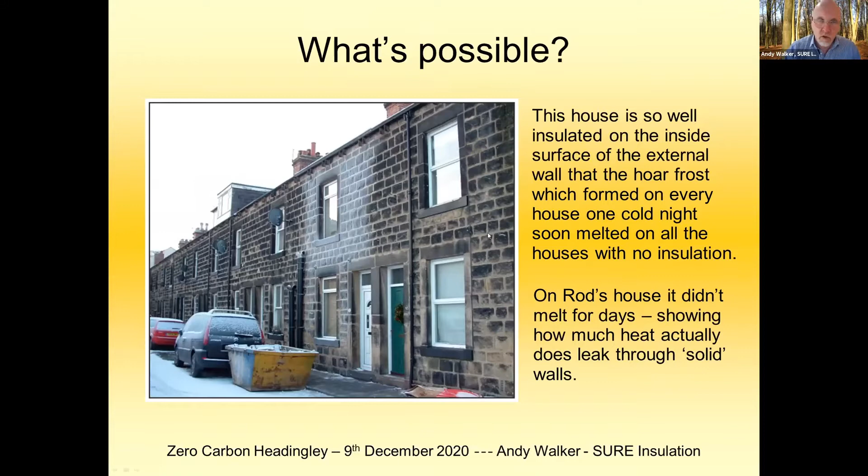This is a really dramatic indicator that all the other houses are leaking heat. So Rod's house is amazing.

It's warm and comfy all year round, and he's got a wood burning stove, but he hardly uses it. You can go in his house and the heating hasn't been on for days and it's still warm. The lighting is all ultra bright LED, run off a 12-volt leisure battery and charged from a very small solar panel out the back of his house.

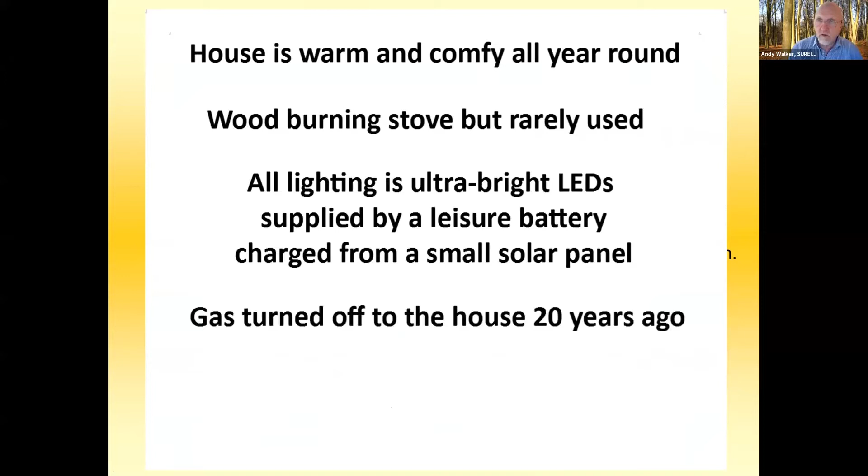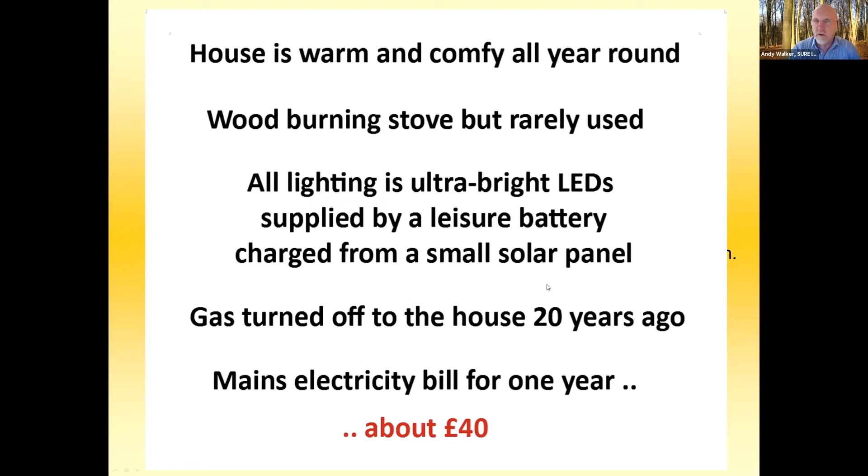The gas was turned off 20 years ago, and his mains electricity bill for the whole of one year that he showed me was about £40. Now, I'm really excited by the possibility that a 100-year-old terrace house can be made to be this self-sufficient. If we could do that with the majority of houses, that would make a huge difference.

My journey to here - I started a community group in Otley in 2008. Then I went on to make an insulation company, and was part of writing the home insulation manual. I work with Leeds Beckett University.

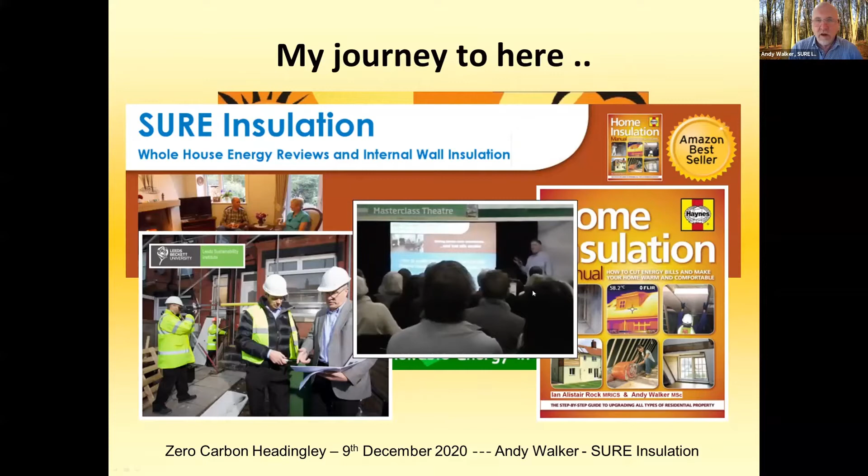This is me and Chris Gorse reviewing some plans of a house that we're doing monitoring in. I do talks in various places. This was at the Harrogate Home Building and Renovation Show. I'm giving some advice at an earthship down in the south of England.

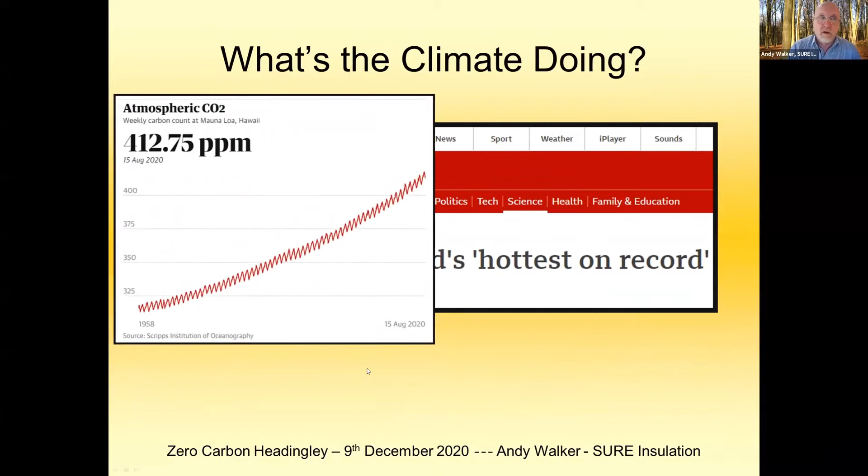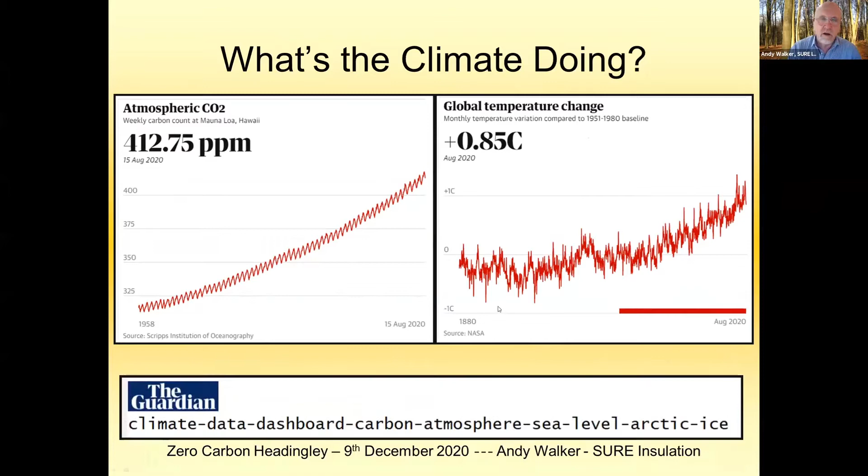What's the climate doing? Well, September this year was the hottest ever. Atmospheric carbon is doing this, and the temperature is doing that. This red bar is the same time scale as this graph, so you can see the two are in line. Here's the source of that information.

Extreme weather events are happening more frequently. We'll all be very aware of the dreadful fires in America. And in fact, this year in the Gulf of Mexico was the first time ever there's been two hurricanes at the same time, and that's quite significant and a real indicator of the warming waters creating all that energy.

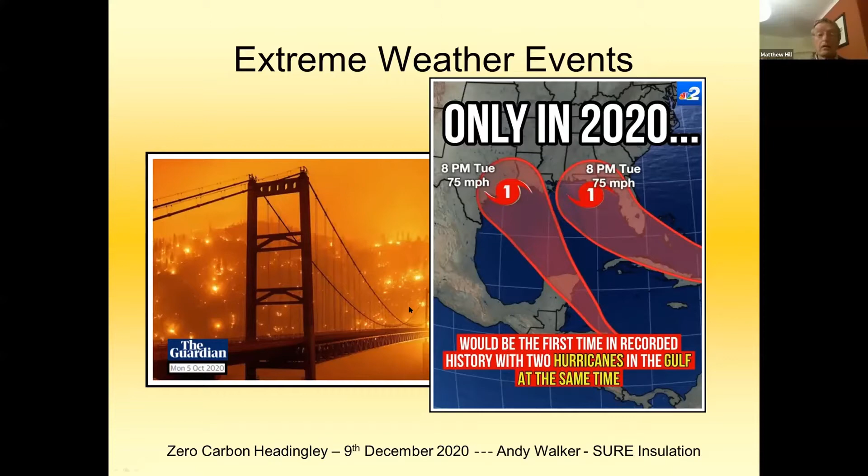Now, I don't know about you, but that's getting a bit close. I always thought tornadoes happened in Texas or somewhere, but Amsterdam really isn't very far away.

One of the other huge drivers for me to be part of this work is the fuel poverty in the UK, which I think is a criminal effect of poor policies. Even with the most recently massaged figures, 2.5 million households in the UK are living in a place where they have to choose between heating or eating. That's actually 10.3% of the whole population.

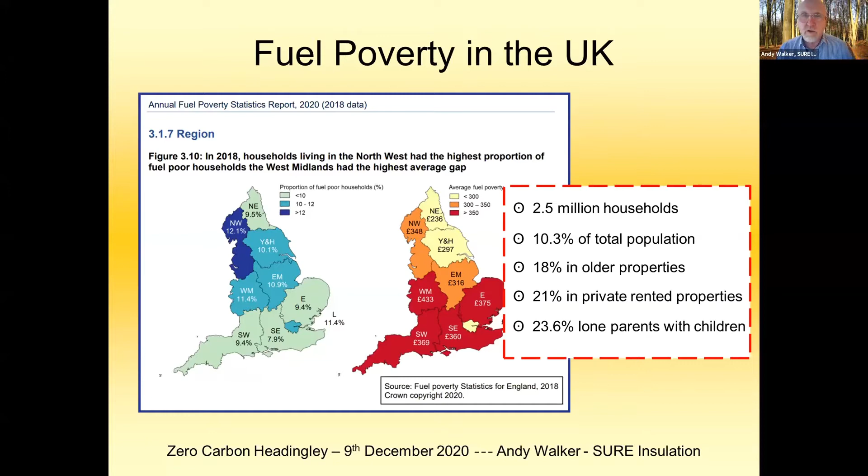18% in older houses, 21% in private rented properties, and that's utterly staggering, criminal, 23% of lone parents with children. Last week I was giving this talk, or a similar one, to a community group in the Scottish borders. So I looked up the figures in Scotland, and I was horrified to find the lowest fuel poverty there is in Edinburgh, and the highest is nearly 60%.

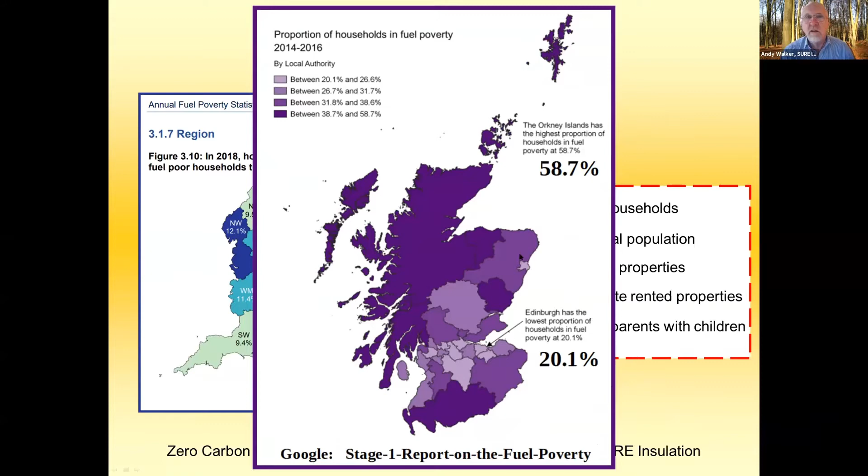So what can be achieved? I've just drawn a very simple bar graph here. The one on the left, the average figure, about 15,000 kilowatt hours combined gas and electricity for the average house. At this end down here, the passive house is about a tenth of that, 1,500 kilowatt hours a year.

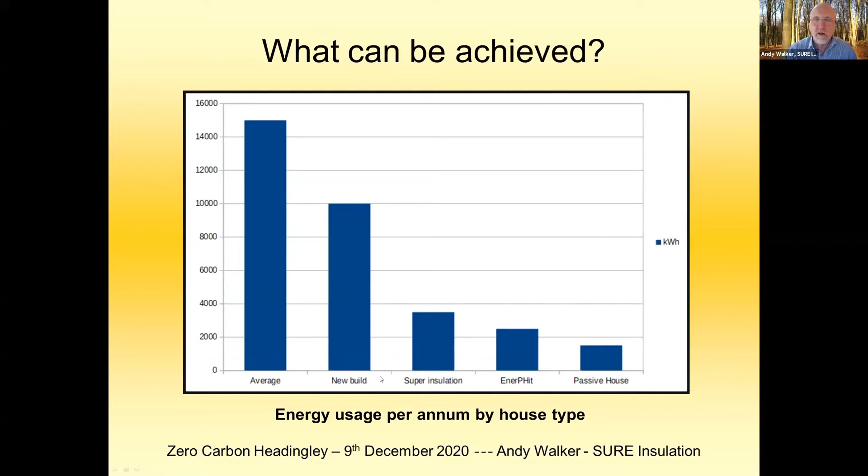A new build is still pretty bad. They're just not meeting the standards. EnerPHit is a kind of diluted passive house version, but very expensive because all the components have to have certificates. So super insulation, a term where we're going well beyond building regs, making a big effort to improve air tightness and putting insulation on our external surfaces, is a good target, I feel.

So why is it a good idea? Well, the whole thing would create tens of thousands of jobs, hundreds of thousands. It would certainly stimulate the manufacturing industry and the supply chain. The health and well-being of millions of people would be affected, and of course that reduces the burden on our precious NHS. It builds community involvement.

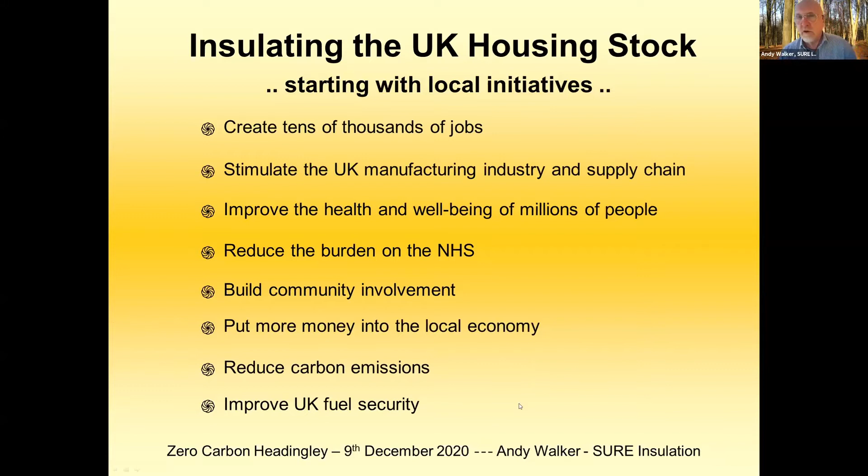Once you've got people working together, they all start to pull their socks up, and if they're not paying huge fuel bills, they are putting money into the local economy. Absolutely, it would reduce carbon emissions, and in fact it would improve UK's fuel security because we wouldn't have to import as much gas and electricity.

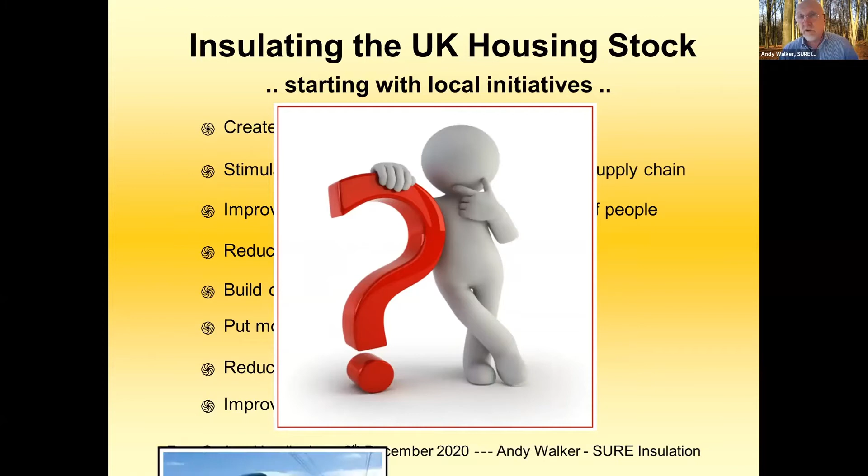Now hang on, if it's such a good thing, if there are so many co-benefits, why is it not one of the biggest national infrastructure priorities that we have? You could choose your own capital project that we could do without to give us insulation for the whole of Britain. Now, government policy we need to change.

We need something like £200 billion to fix all of this, which sounds like a lot of money, but they seem to find it. If one of their mates has got an airline who's going broke, or a bank is about to crash, they just seem to print it.

writetothem.com is an easy way to send a message to your local councillor or your local MP.

Heat loss from a building, there's several ways that it comes out. Through the floor is often a forgotten one.

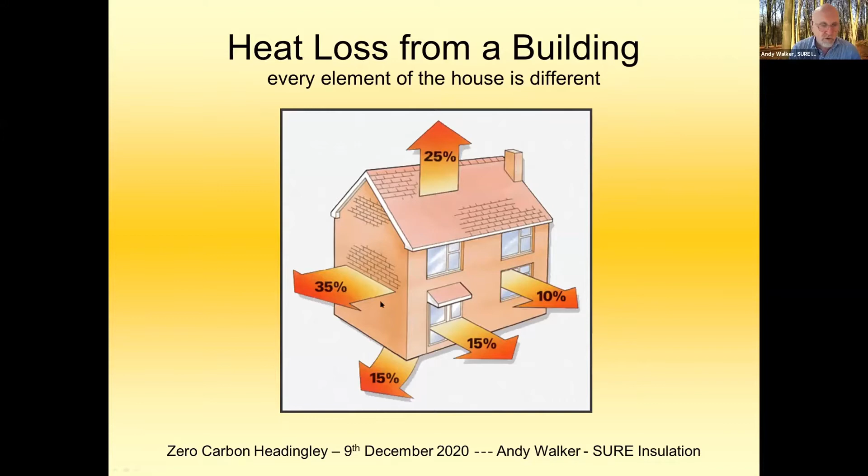Could we have people turning off their microphones, perhaps? Thank you. With a stone built property, this figure through the walls would be about 45%.

Okay, I'm going to explain U values, and the reason I want to do this is because every discussion about what you have now and what you could have is based on this simple number.

It's a term which describes the amount of heat which is flowing through a surface. It applies to any surface. So let's just take this 1 square meter of wall. We're going to say it's got a U value of 5.

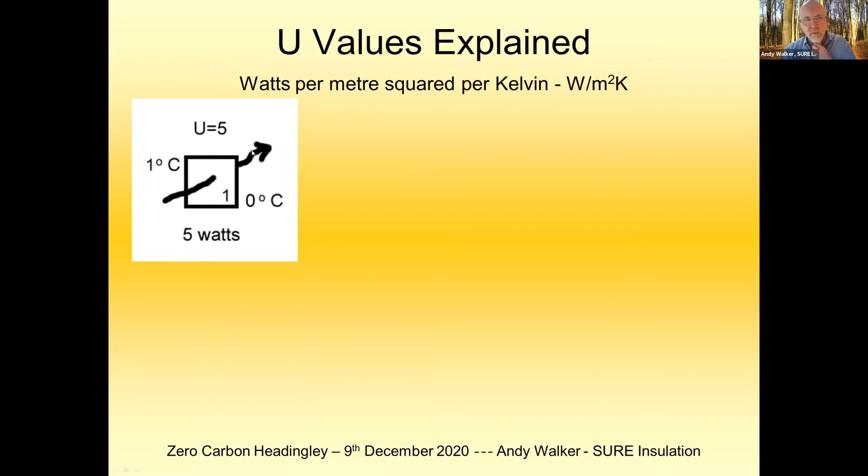There's a temperature difference of 1 degree C inside to outside. That 5 means that 5 watts of energy is permanently flowing through that 1 square meter. If we go up to 20 degrees C, a more typical room temperature, then we're now up to 100 watts through that 1 square meter.

If we take a more typical area of an external wall, let's say it's 10 square meters, again with room temperature, we're now up to 1,000 watts of energy, 1 kilowatt. Now, there will be losses through the other surfaces in that room, the floor, the party walls, and the ceiling. But whilst we're sitting in this room, we have to pour 1,000 watts of energy into that room, or else that temperature will fall.

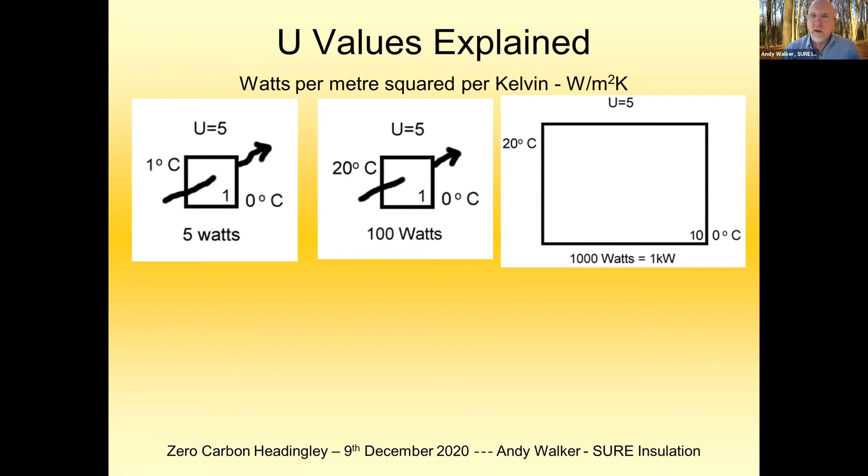I bet you've all been in houses where you can get the room warm, but the moment you turn the heat off, the temperature plummets. So a fire like this, I imagine there are people on the call who can remember these. I grew up with this kind of heater in the corner of the room trying to warm it up.

Okay, well, let's put some insulation on the wall. Let's try 100 millimeters of Kingspan, often called PIR. The U value would drop to 0.25, meaning there'd only be 0.25 watts flowing through that surface. For the 20 degrees C room temperature case, we're now up to only 5 watts, and for the larger wall here at room temperature, we're up to only 50 watts.

Now 50 watts - a human being gives off about 50 watts when sitting still, or 3 cats. So you could say we either need more insulation or more cats.

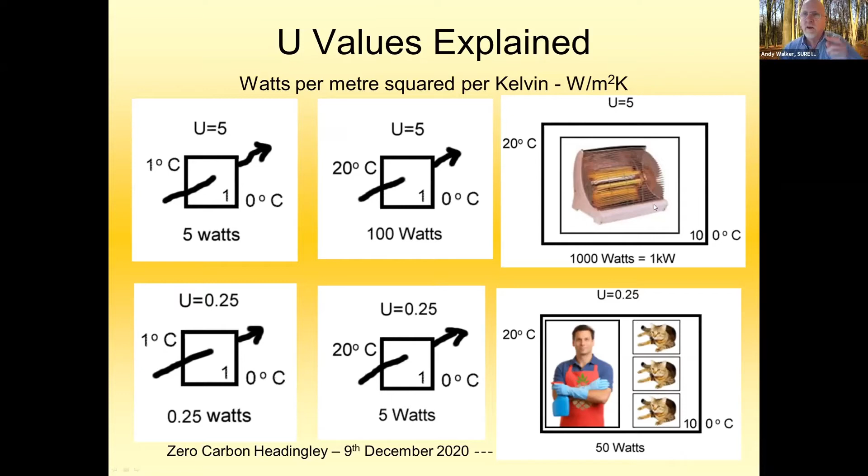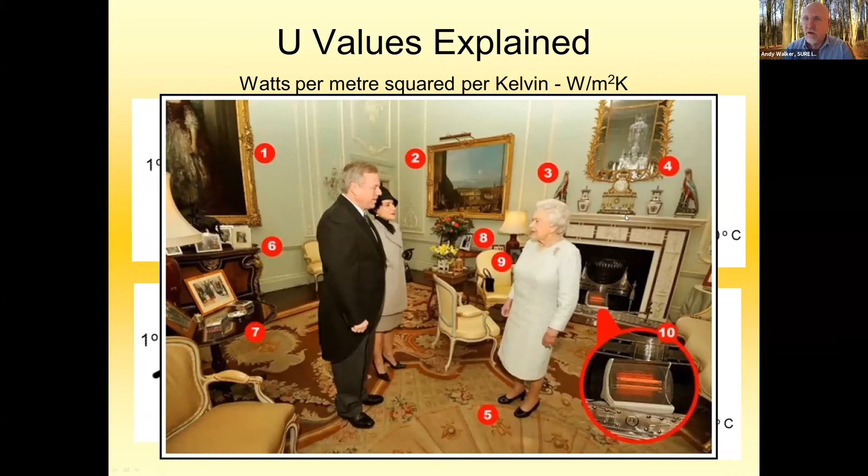Now, this kind of fire, I mean, I can't believe anybody still uses this kind of fire. Well, here's the funny thing - in a newspaper, only a couple of years ago, there was this picture of the Queen meeting some dignitaries. What is she heating her room with, surrounded by millions of pounds worth of paintings? Well, it's a fire like that.

Okay, so let's give you a framework - this is important because this is how we describe what's possible in each house. Stone built house, somewhere between 4 and 10, brick built 1.5 to 5. The golden standard here is the U value of 0.1.

If we can get down towards that, then your house is going to self-heat. What builders would typically do is put cavity wall insulation in, which is pretty bad, or just 50 millimeters of PIR, Kingspan, which is also not close to our ambitious target.

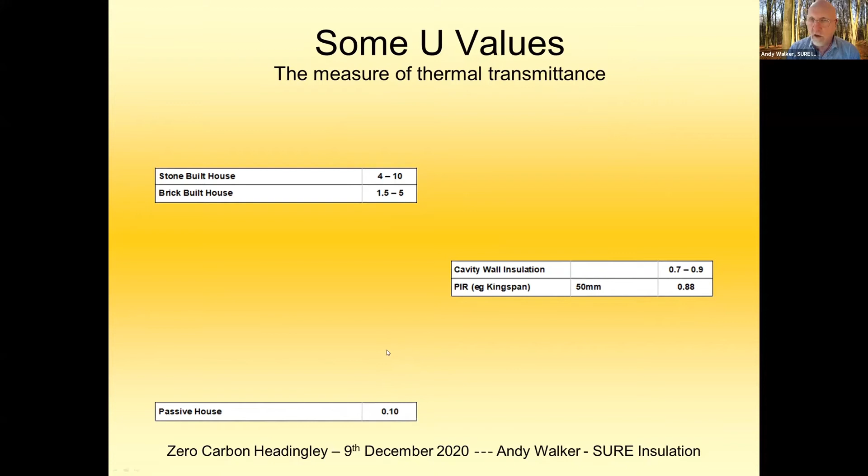200 millimeters of mineral wool or polystyrene or 100 millimeters of Kingspan gives us a U value in this kind of area. Or if you want to get more ambitious, then PIR at 150 millimeters comes to here. The only other material that can challenge Kingspan as a rigid board insulant is aerogel, but it's 10 times the price, so it's not really available as a domestic product.

Single glazed window is 5, double glazed window with air 2.6 to 2.9, argon filled double glaze is twice as good, argon filled triple glaze twice as good again. Now some of you will perhaps have leaded lights in your rooms or above the door, but the lead is so conductive that a typical stained glass window, leaded light window, has got a U value of over 100. So it's practically thermally transparent, heat just blowing out.

And for comparison, here are some figures for metals, which are wonderfully conductive.

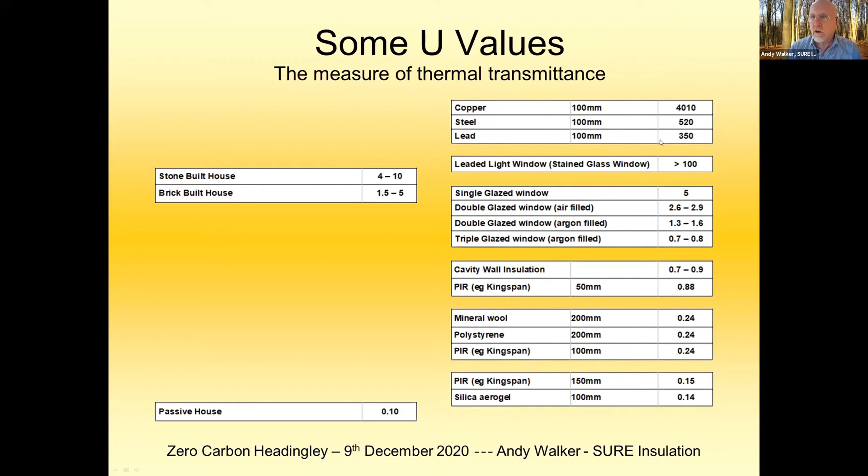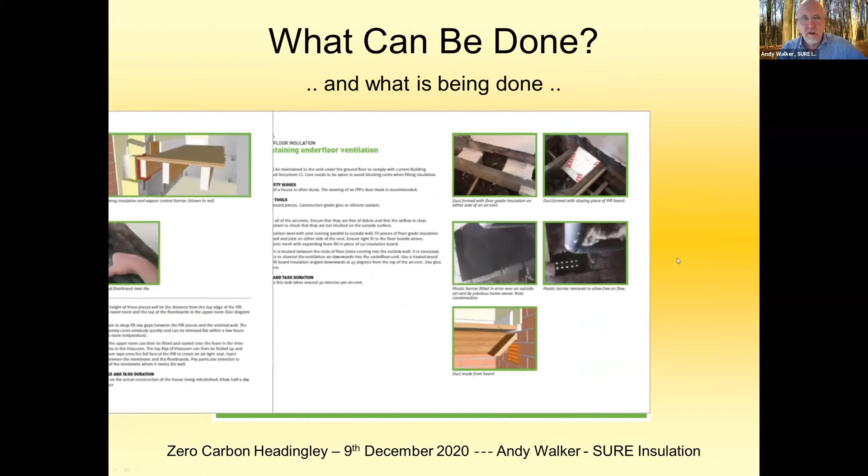What can be done? Well, this is a manual that I worked on with Leeder, and Matthew is with us today from Leeder, and he helped with this. I'll let some of these pages slide on as I'm talking about this. This is a guidance manual of how to retrofit particular aspects of your home, and this is available for each of you to download as a PDF. It's available for anybody to download. I'll give you the link.

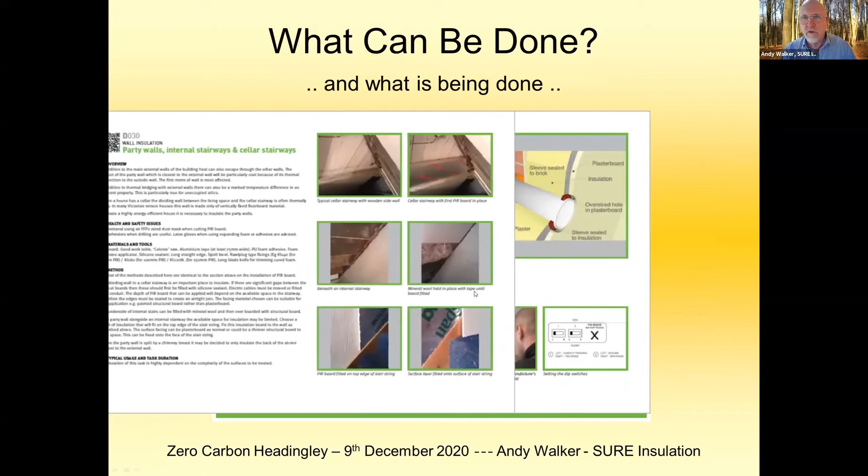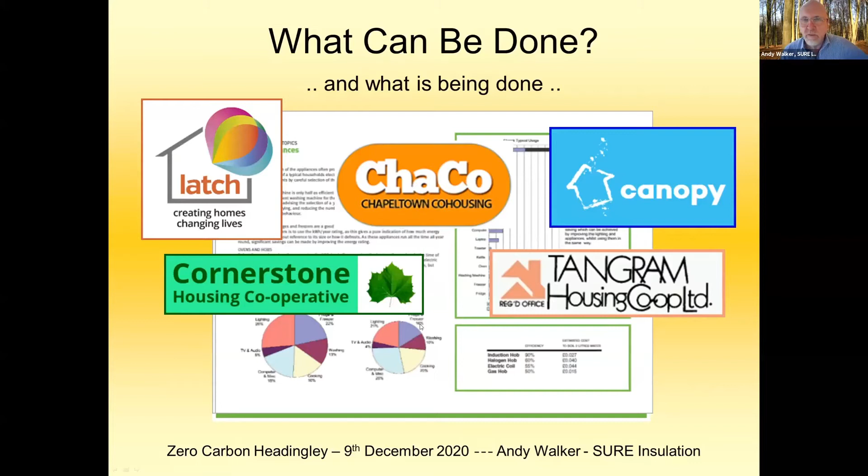This gives you some of the ideas about what you can do in particular places. These are some of the housing associations and housing co-ops that I've worked with in Leeds, and they're using this manual pretty much on a daily basis. This is worth having a look at.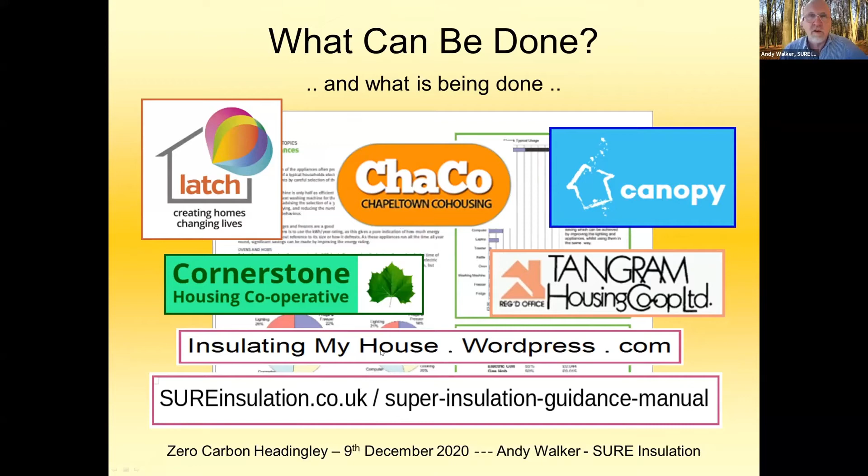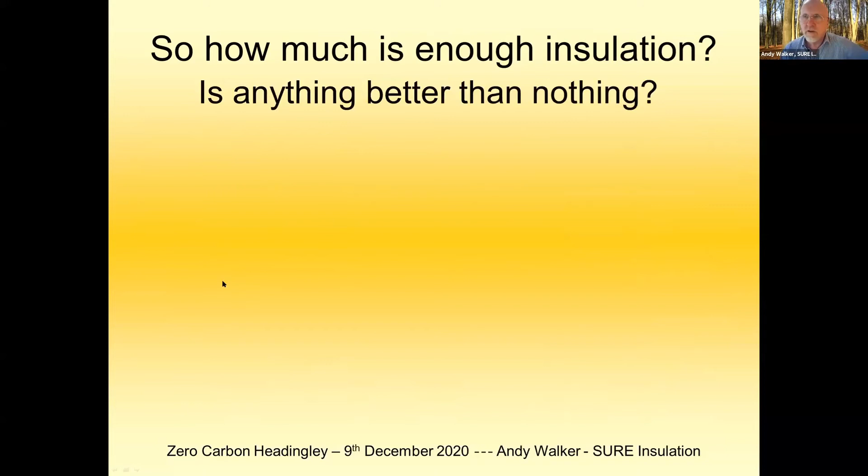Okay, so how much is enough insulation? This is always a good question. Is anything better than nothing? Well, no - if it's cold and you're not wearing enough, you're going to be cold.

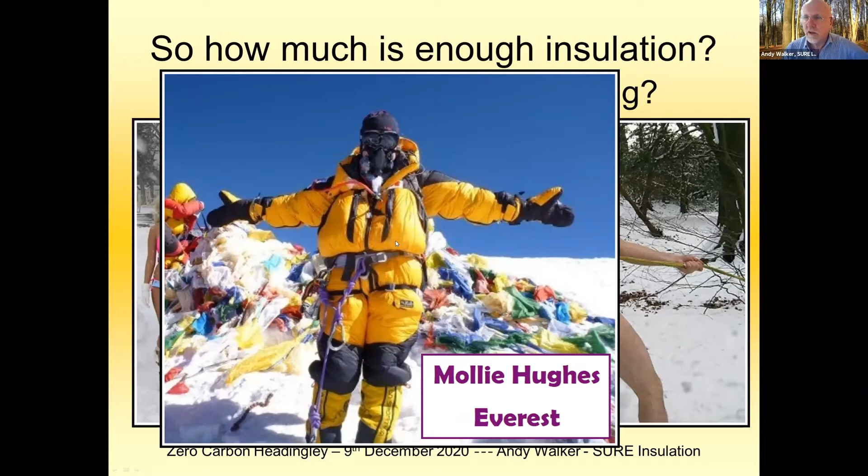So what we need is - this is Mollie Hughes, who was the first British woman to climb Everest by 2 different routes. And here she is wearing sufficient insulation to keep her warm. That's the measure - that's how you decide how much is enough.

So here's a case study of a house in Armley I did a couple of years ago. This is the room I was working in, an upstairs bedroom. It's actually got 3 external walls on it, the gable wall around the corner.

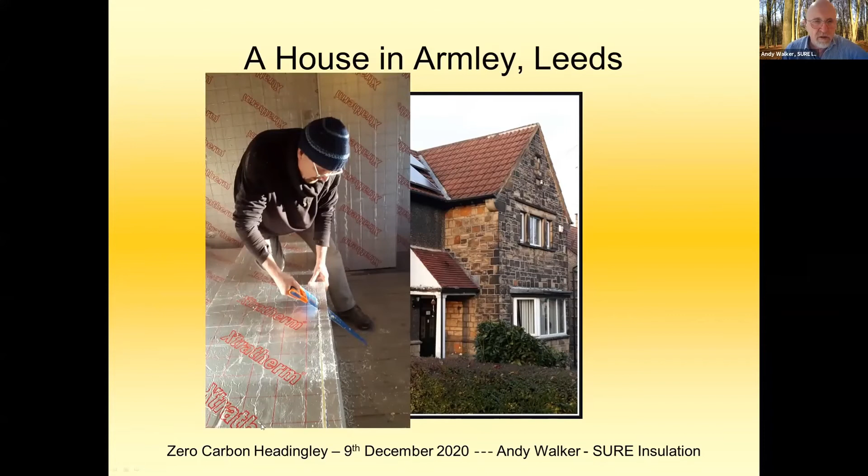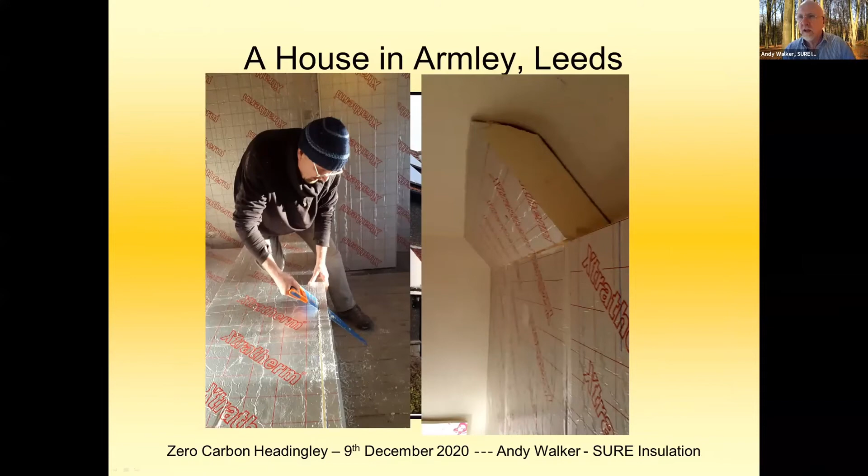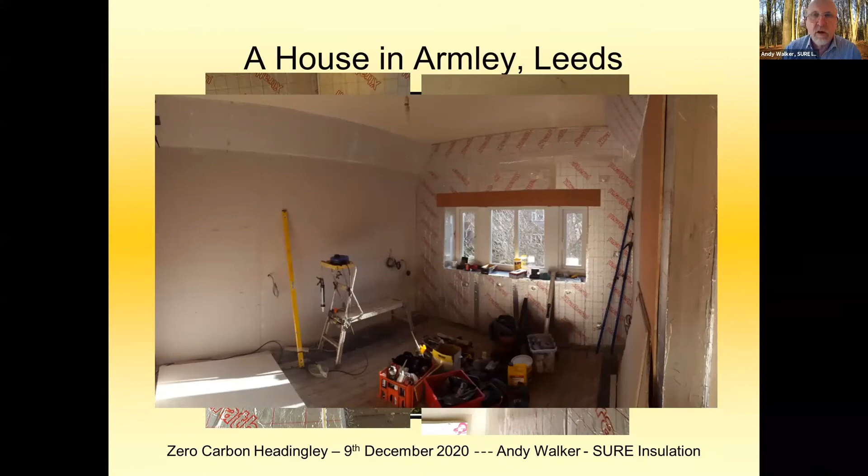Now, this is some of the Xtratherm. I'm just shaping it here, and it's actually going into this sloping part of the ceiling, which apparently in Cornwall they have the wonderful word 'skeeling,' which I'm now trying to bring into every conversation. Here's a typical view of that room, and we've insulated the outside surface, this wall and these sloping sections.

With 150 millimeters of Xtratherm, this has been a transformational change to the room. It was so cold that even with the heating full on with their hot air heating system, they couldn't use it. They wanted to use it as their main bedroom, but they couldn't. In fact, the work I did blocked up the hot air vent on purpose.

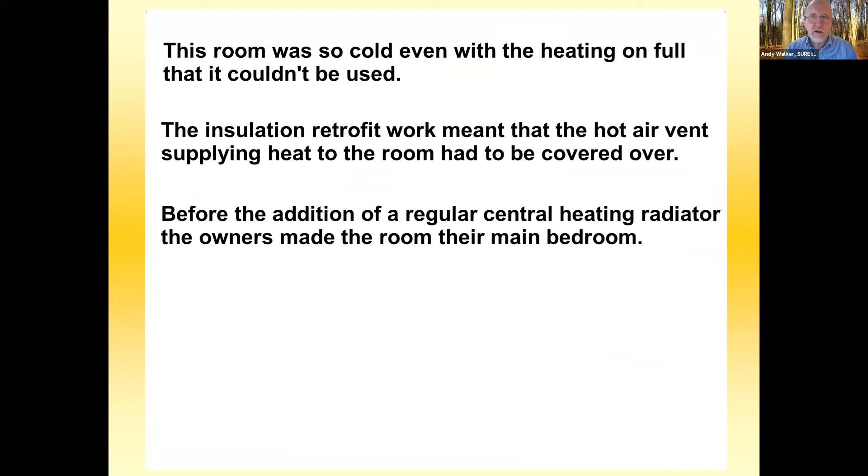Don't worry, I did notice it was there, but it just happened to be where I wanted to put some insulation. Before they put in a central heating radiator as planned, they made it their main bedroom, and found that with just 2 people in there and the bedside lights on, the room stayed at a comfortable temperature. In fact, they told me it's now the warmest room in the house. Insulation works.

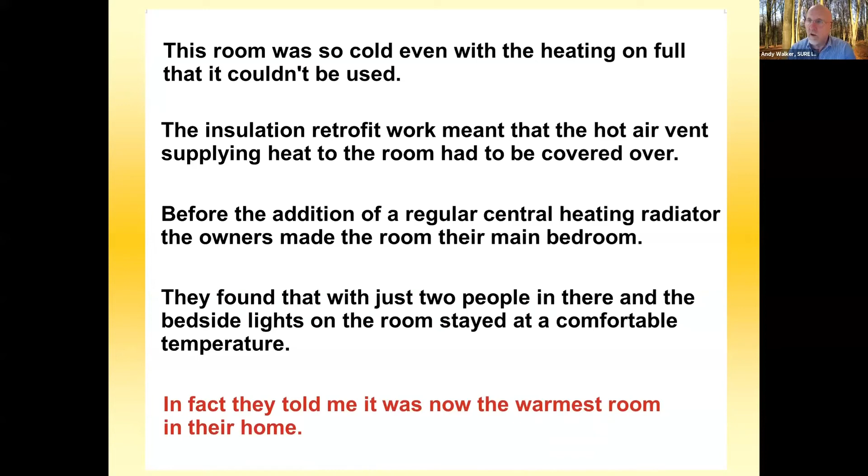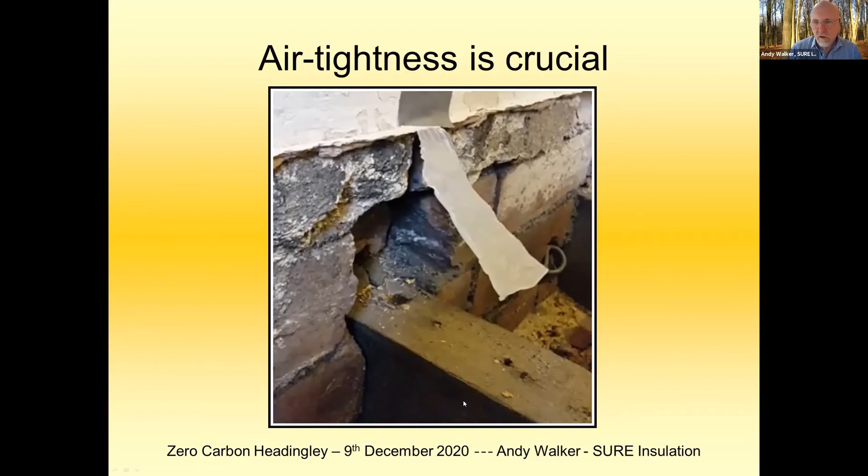Now, air tightness is crucial. I did have a video to show you here, but I'm not going to play that tonight. This is the floor joist going into the inner leaf of the outer wall. What's not understood well is that they're sitting in loose sockets, and there's always cold air blowing in around them. This tissue paper I had taped onto the wall was blowing backwards and forwards because of the airflow coming in. It's really important to deal with this air tightness and cold air blowing into the center of the house to get a warm home.

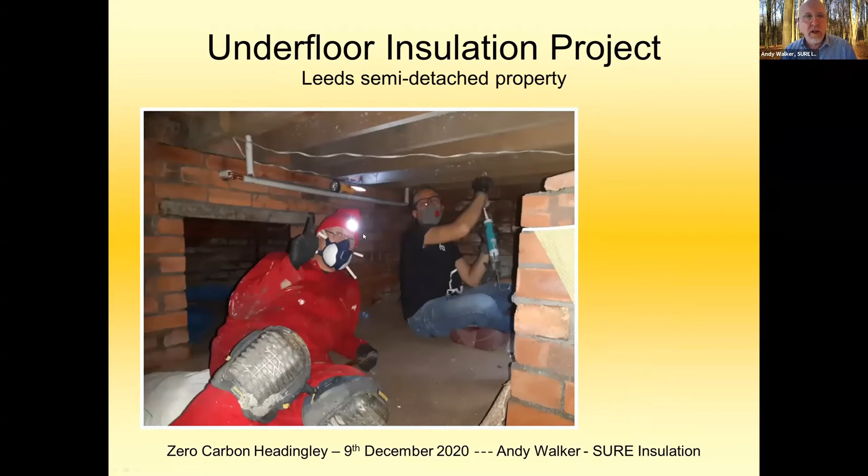Okay, underfloor insulation project. This is working under a house in, I can't remember, Headingley. There we are, it's in Leeds. You've got to have all the gear on, of course, to do this kind of work.

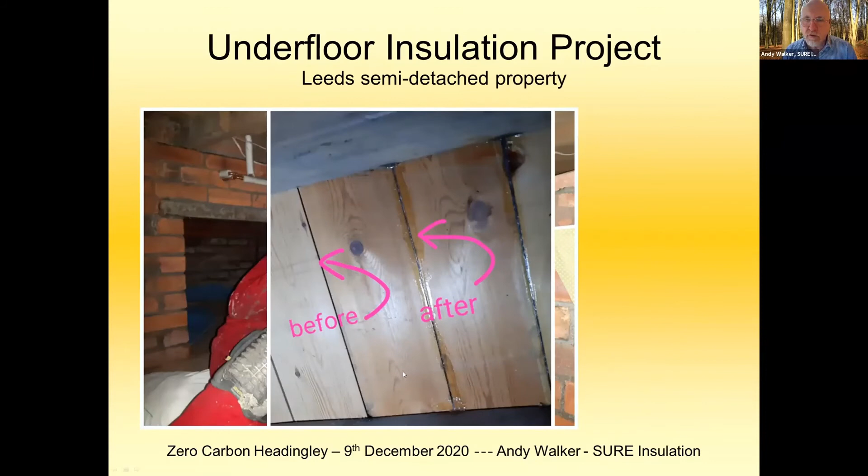What we're doing here is one of the jobs is to seal the gaps between all of the floorboards. There's a lot of air leaks between the boards as they shrink over time, and also around the edges. So bathroom silicone sealant is how we do that. Here's some expanding foam going in around the edges of the room.

You find some treasure whilst you're down under these properties. Here's a remarkable old newspaper that we found. I think there were adverts for cars for £300 brand new or something like this.

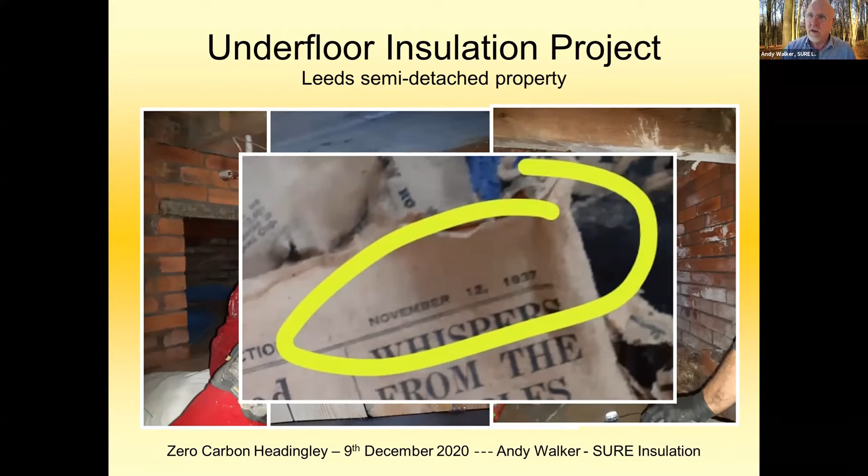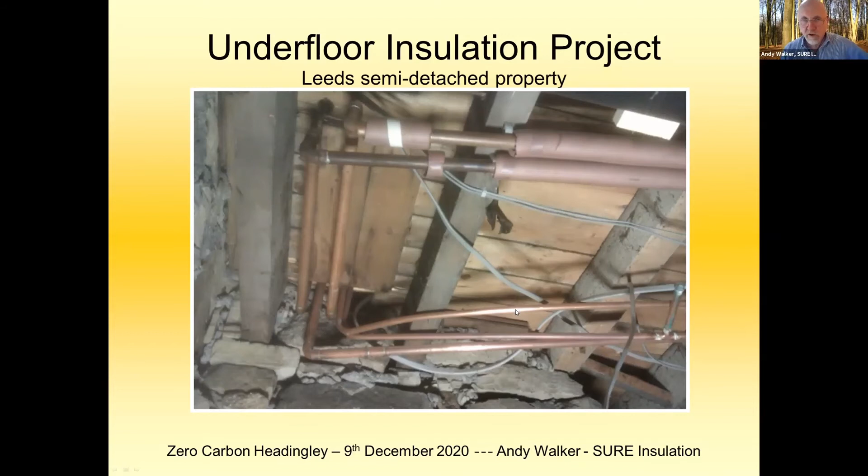The other thing you find under floors is meter after meter of bare copper pipe, and this is hemorrhaging heat into the local area. Copper is incredibly conductive, so the outside temperature of these pipes will be exactly the same as the hot water inside them, and that heat is being wasted.

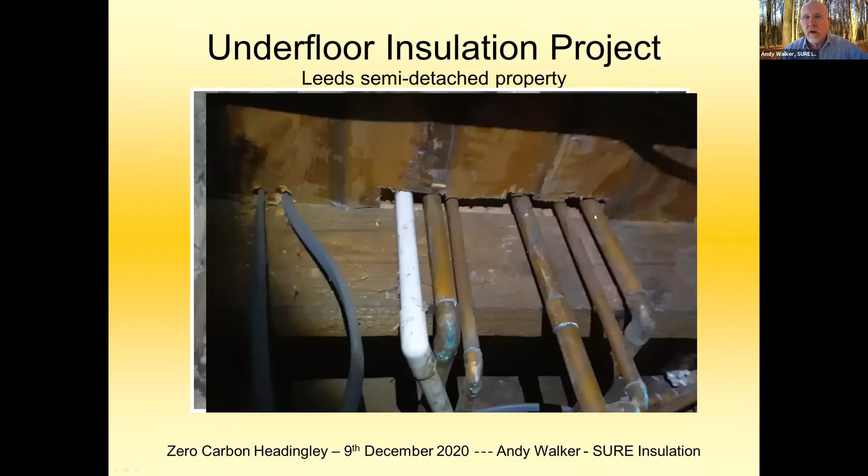Quite often you'll find that where the pipes are going through the floorboards, people without training have left huge holes, and this is another source of cold air blowing into the house from under the floor. Of course, what we've really got to do is put a very thick layer of insulation around the pipework to keep the heat in. One of the advantages of this is that the hot water created in your boiler actually gets delivered to the radiators in your room at about the same temperature it started. So, of course, your rooms are going to heat up quicker as well.

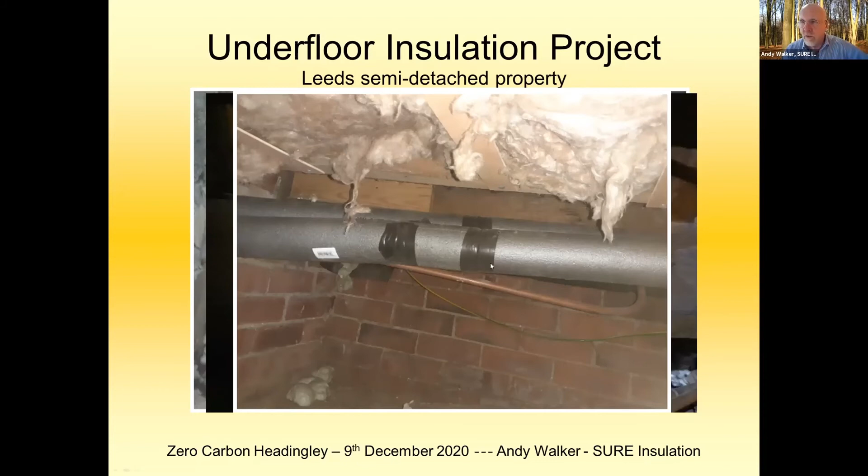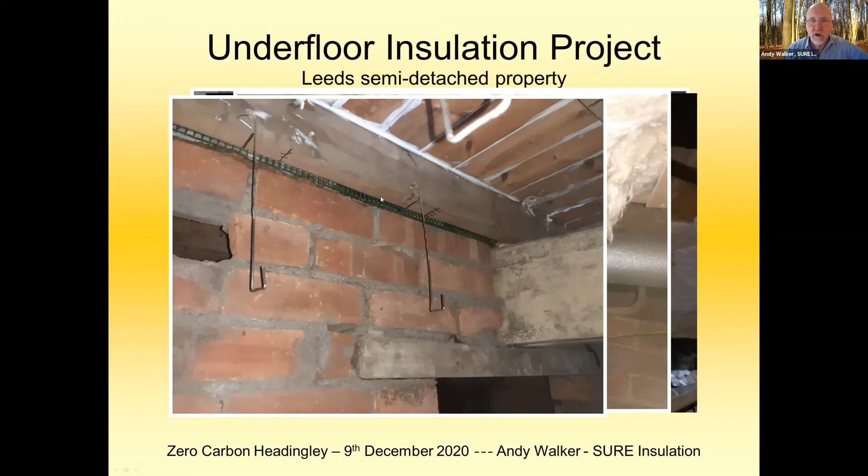This is a detail showing the silicone on the joints. At the edge of the wall here, I've put some plastic mesh, and I'm going to fill this entire space behind this joist with expanding foam, which gives me both airtightness and insulation. These metal hangers are part of a suspension system I create, which allows me to put 2 layers of mineral wool below the floor, one between the joist and one below it at right angles, and you can get down to some very low U values by doing that.

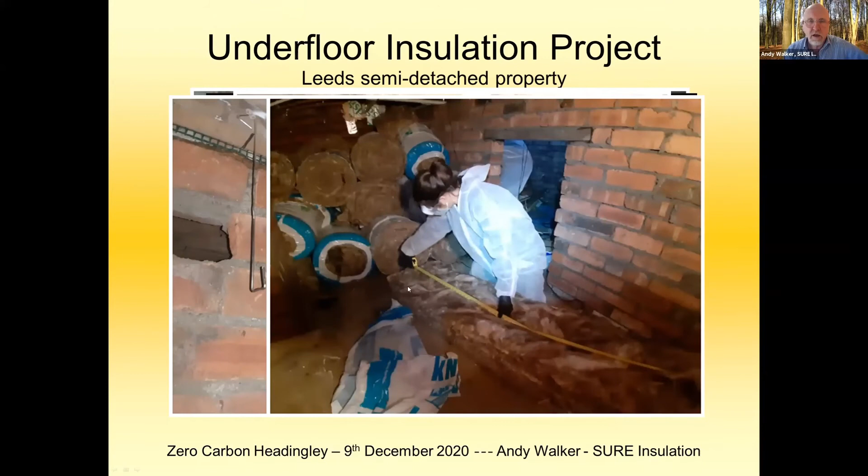So we end up with a team of people down here. You measure the insulation out, then fit it between the joists, and appropriate PPE is necessary for this. This is actually a powered respirator.

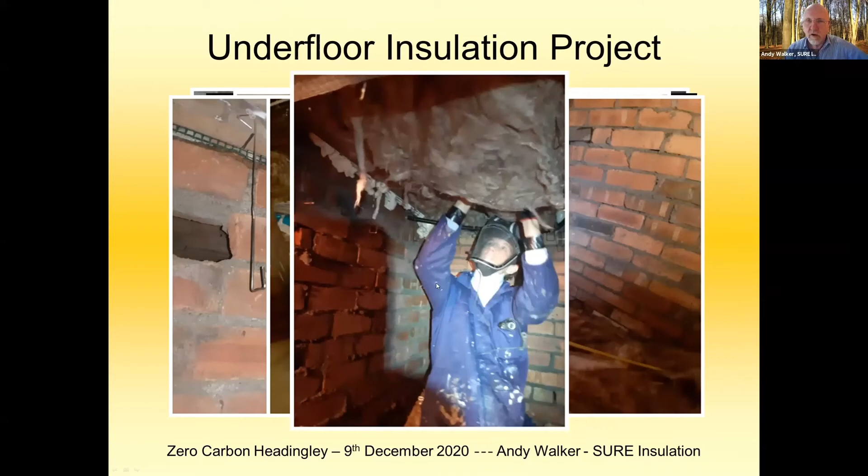So here's a community insulation project. I've repurposed the term housewarming party to describe how people can come together and work on each other's homes, and I run workshops in people's homes to get the job done. This is a house in York. It's actually one of the founders of York Community Energy.

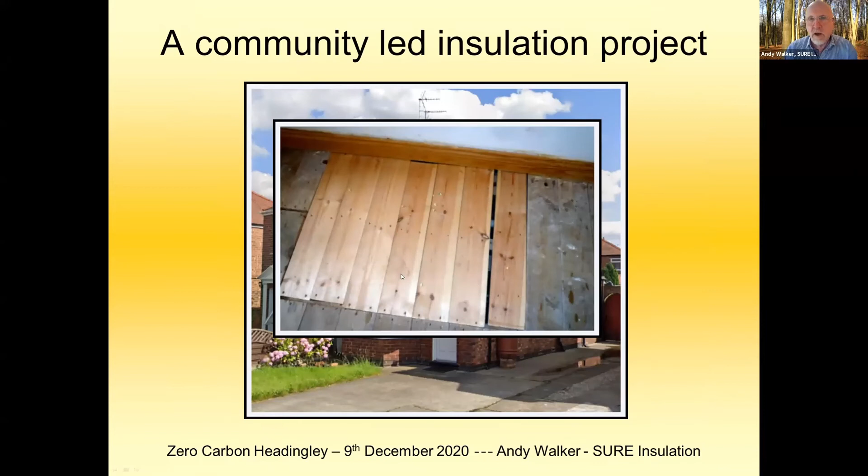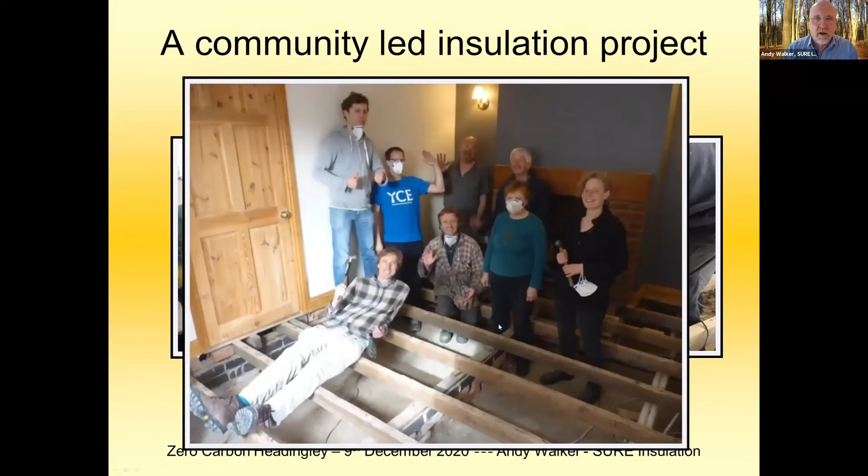We're going to be working in this downstairs room. What we found when the carpet was lifted was huge gaps in the floorboards and around the edges, letting lots of cold air blow in. So we had to lift the floorboards and take out all the nails, either with crowbars or angle grinders.

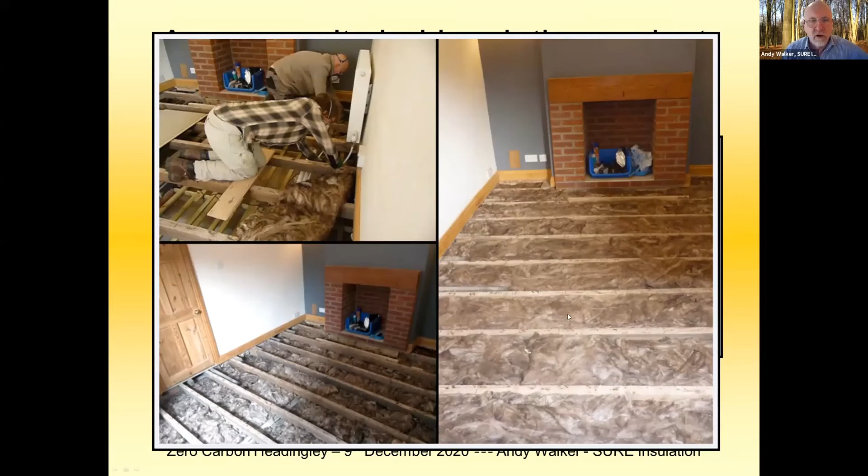Here's the team once we've taken all the floorboards out and cleaned the rubble from below. Once we build this lattice work, this matrix of timber, we feed the mineral wool in to create two layers - the first underneath the joists, the second between the joists. And then finally, we've got the new floor fitted.

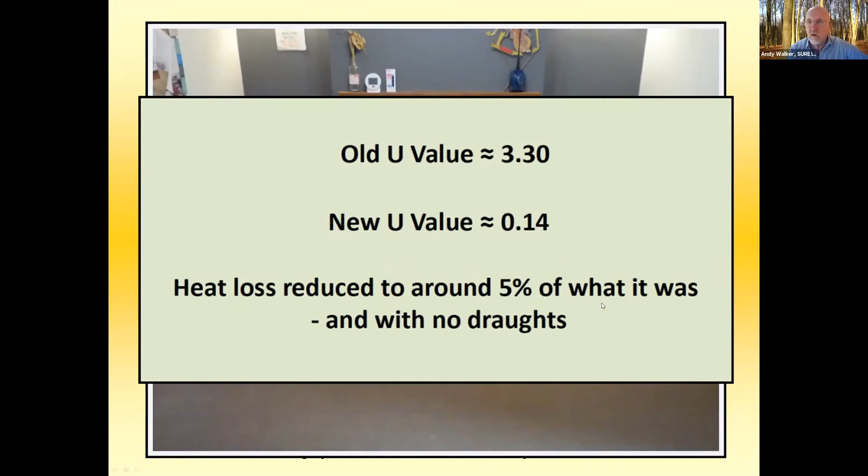So how's it done? Well, this is a house in Bingley. First of all, we'd strip the plaster from the walls, apply insulation onto the walls, then plasterboard and skim it. You can see our clever plasterer has recreated the curves around the corners. Cornice and skirting is a real challenge, but there's companies I work with that can recreate any molding and reinstate it.

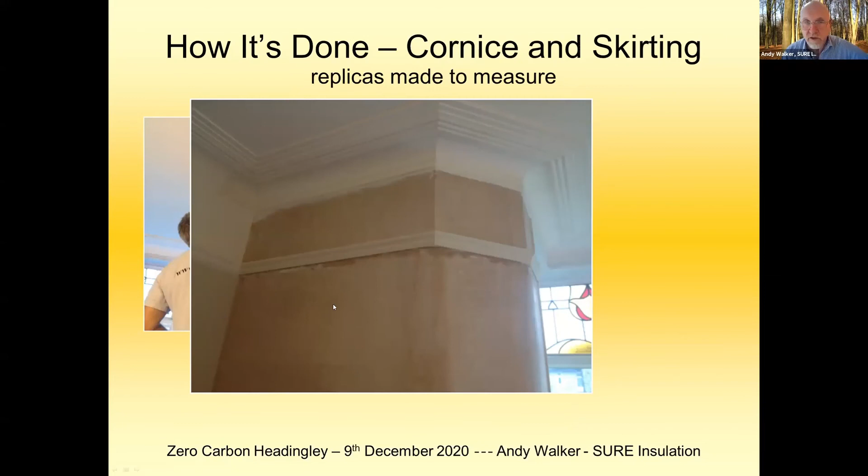In fact, on this photo, this is the original, and this is the new - and this is the insulated wall. So you can see it can retain the look and feel.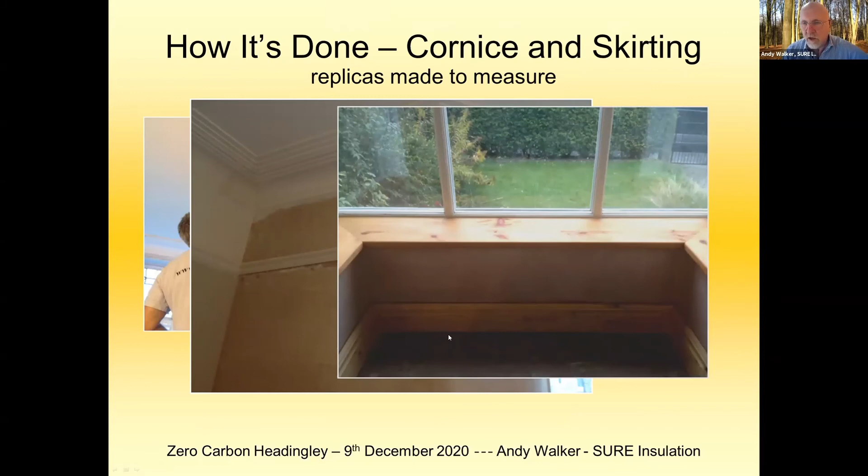Similarly, with skirting boards - this is a design you can't buy anymore, so I gave a sample to this other company I work with. They created a cutter and we could run off as much length as we needed to recreate the look of the room. And there's the room when it's finished, with the two urchins now on this much wider window ledge, which has become kind of a window seat, a bit of a feature.

So, appliances - before Tony reminds me, I am conscious I'm coming to the end of the time. This is an experiment I did with my fridge.

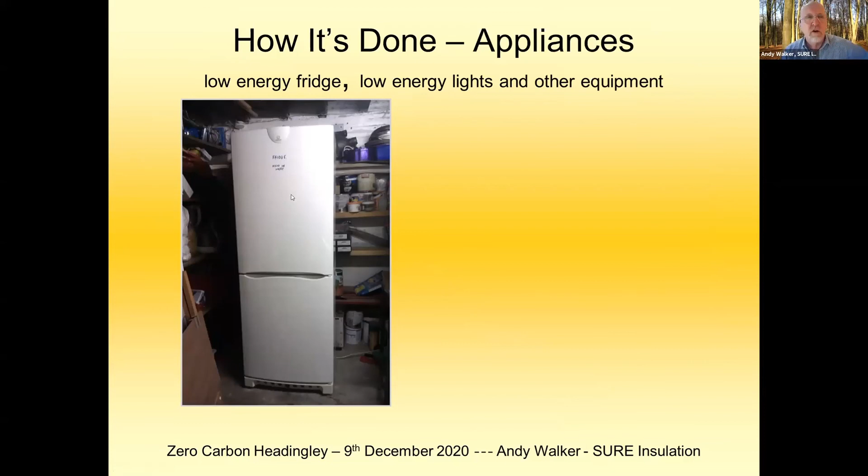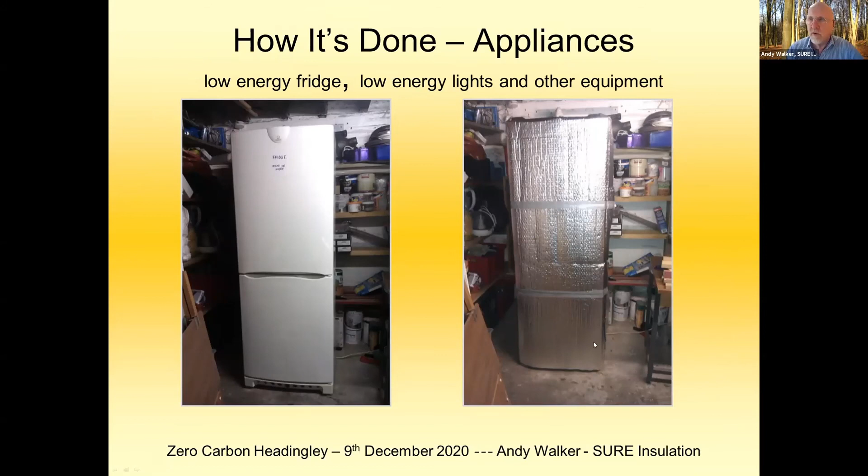Fridges are cold to the touch, and that's because the insulation isn't sufficient on the door and the walls. So what I did was insulate my fridge, and I did a before and after set of measurements of how much energy it used, with a very accurate meter. I did it over 2 weeks, several times a day, and with this insulation on, it used half the amount of energy. In fact, overnight, when I wasn't opening the door, it didn't use any energy.

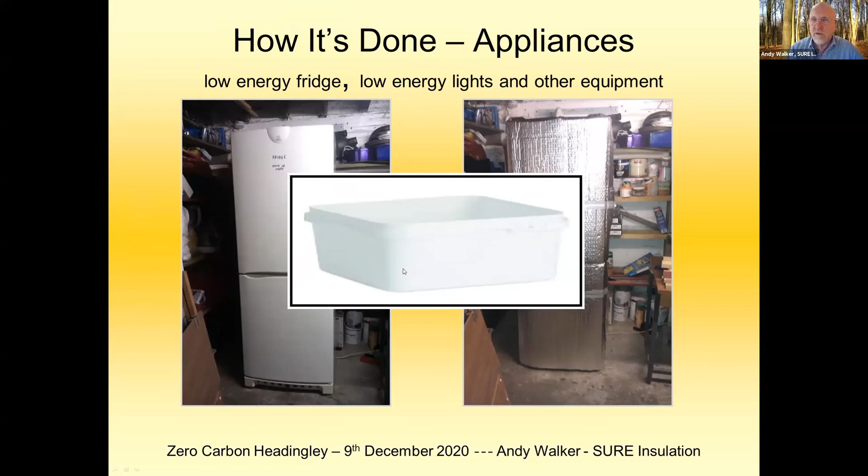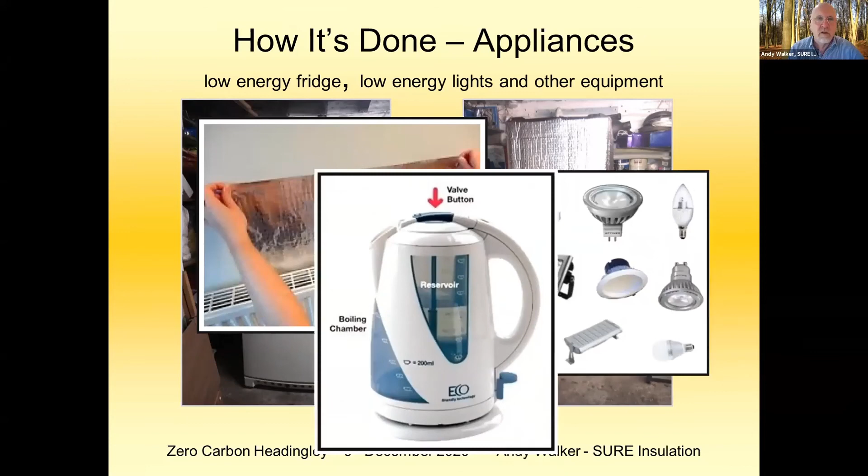One thing we could consider is using plastic trays to store food in the fridge, so the cold air won't come falling out. Radiator foil - definitely a good idea. LED light bulbs come in all shapes and sizes. Kettle - I like this one, it's got a reservoir, you just put as much as you need to boil.

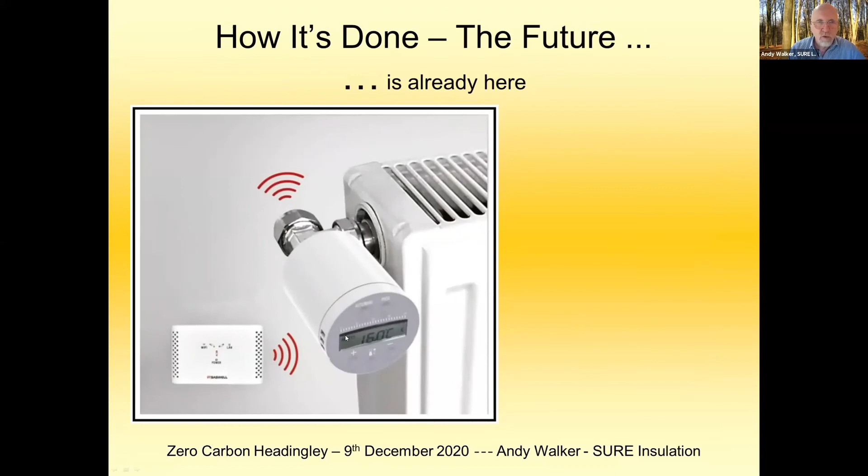And this one I particularly like - you can actually choose the temperature at which it clicks off. The future is already here. You can get wirelessly controlled radiator valves, which allow you to zone your house by radiator.

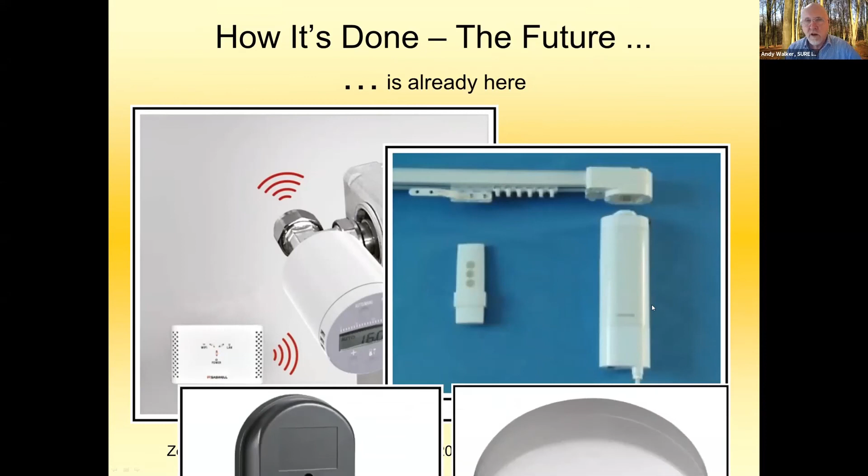We can have curtains that automatically open and close - I mean, this is 1970s technology. I really like the idea that by using occupancy detection, motion sensing, as somebody walks into a room we could open the curtains and put the heating up. In other words, we could keep the curtains shut during the day and the heating on low until somebody's actually using the room.

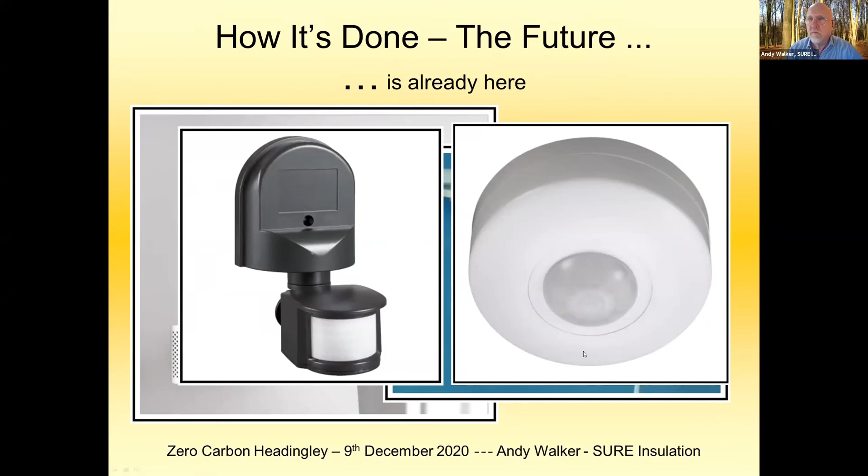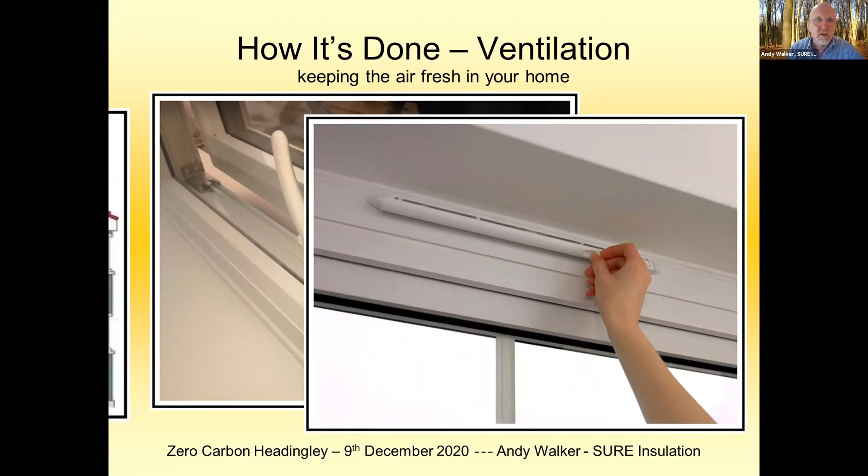Ventilation - we could open the window. That actually works rather well once you've insulated the walls. Trickle vents are really important. Whole house mechanical ventilation is where you've got a very sealed exterior envelope, and you're extracting moist, stale air from kitchens and bathrooms and putting fresh, warmed air into living spaces.

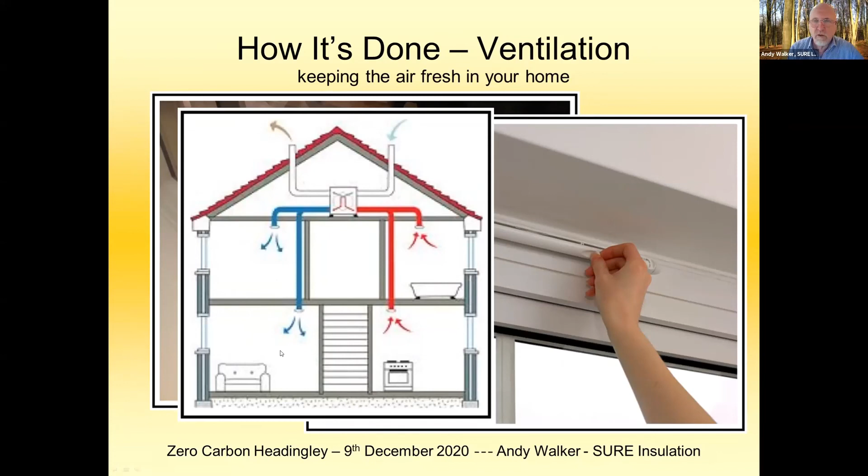But it's very hard to do as a retrofit. So what you can do is individual room mechanical ventilation with heat recovery, and they work very well.

I'm interested to talk to you. Thank you.